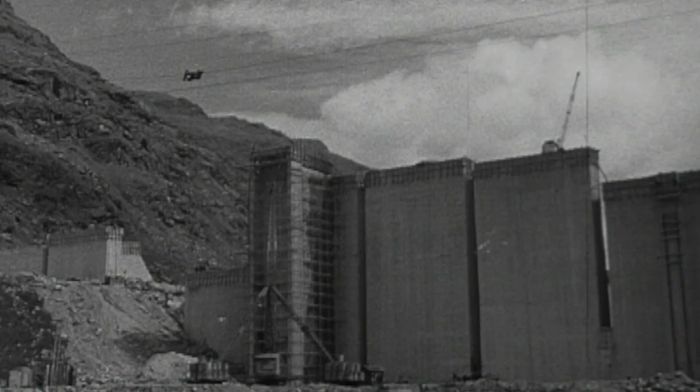In the middle of the 20th century, Scotland experienced an energy revolution. From the 1920s until the 1970s, thousands of men laboured to build huge dams and power plants, enabling the production of renewable hydroelectricity on a grand scale.

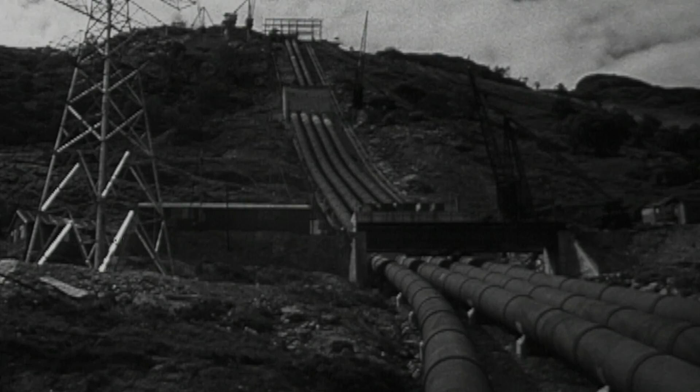Harnessing this power from the glens was difficult, dangerous work, but the energy created supplies countless homes and businesses across Scotland to this day. Now, half a century on, this small nation is bearing witness to another vast engineering triumph. But this time, the power is coming not from water, but from wind.

Part of SSE is Scottish Hydro. It's part of the heritage, it's part of the DNA of the company. The wind has allowed us to reawaken that heritage and bring it up to date.

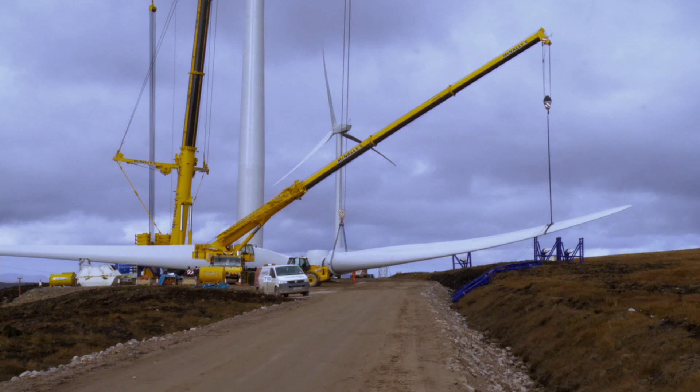We've achieved 1,400 megawatts presently, more than what was achieved in the 50s and 60s from the whole hydro portfolio that we built in those days. And we'll ramp that up to 4,000 megawatts by 2025. The overall capital cost of that onshore wind farm programme will be about £6 billion.

SSE currently has 700 wind towers in operation around the country, from Sutherland to South Ayrshire. To more than double current capacity in little over a decade is a highly ambitious target. Achieving it will require the addition of another 1,300 turbines in sites spread across the UK, from the Shetland Isles to Essex.

Onshore wind is the cheapest form of low-carbon electricity and renewable energy. It's cheaper than nuclear, it's cheaper than offshore wind, it's cheaper than hydro. Therefore, it is the most economic way of society meeting its needs to clean up its energy supply. And that will remain the case. So it is entirely the right thing to do for any country, be it Scotland or anywhere else, to maximise the potential for its onshore wind resources.

Being blessed with a strong natural wind resource is one thing, but wind turbines don't just grow on hills. Each wind farm demands years of planning just to get to the construction phase. But long before that, the process begins with the identification of a suitable site.

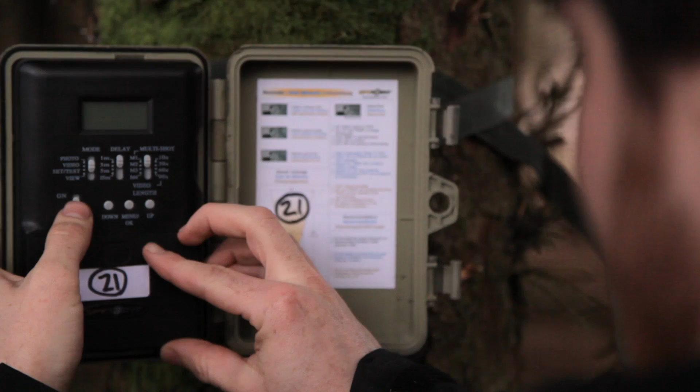...we'll then commence preparation of the scoping report. That's basically to give us the detail behind the environmental impact assessment, so it will determine what additional surveys, assessments, analysis that we need to carry out and include within that impact assessment.

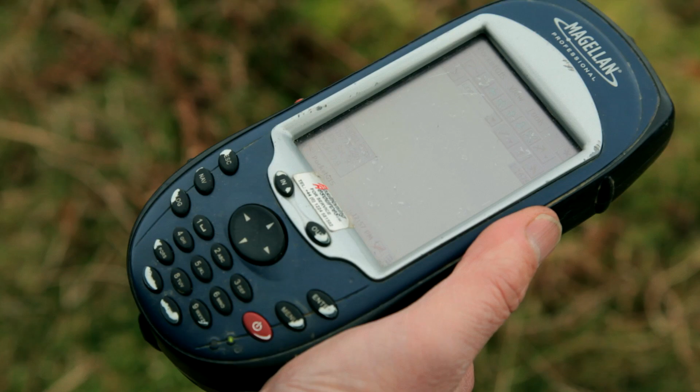Our involvement in a project like this would start with a desk-based assessment where we would examine old maps and air photographs, assess where things had been found in the past. That would provide us with background information to go out and do a field survey, assess whether they still exist, their condition and their vulnerability to the development.

Once that task has been completed, we will compile a report which will be sent to the council and mitigation measures can be put in place. All the surveys and assessments are carried out and we've refined the design. The application will be submitted. Hopefully we obtain planning consent. Once consent's granted, the project is then handed over to the construction team.

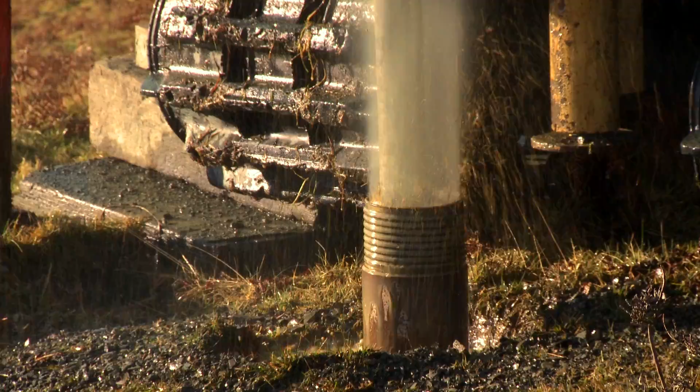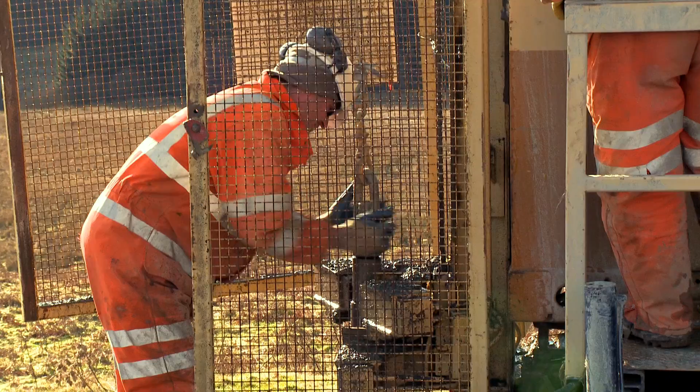It is only now that detailed ground investigations can begin. From desktop studies and the information we've been given before coming to site, and from geological records, we'd tend to know what the ground is made up of, how much soft material overlays the rock, and the type of rock. We then come along and carry out investigations at specific locations, trying to confirm the records, whether they're the same as expected or whether there are any changes across the site which might affect the location of the turbine or its foundation, and also any problems that might come up during construction.

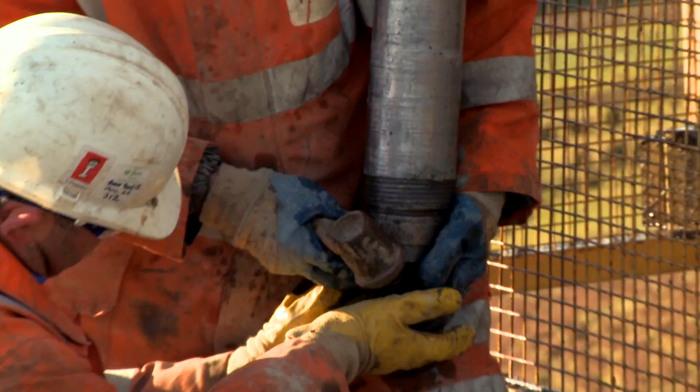The information gathered at this stage plays a significant part in determining the layout of the proposed wind farm. But whatever complicating factors are thrown at the planners, it remains vital that the final site is designed to maximise the available wind.

Initially, it's laid out based on resource, so how much wind you can get from each turbine location. We need to consider issues such as shear, inflow and turbulence, which depend on the topography, proximity to trees, and the wind direction. Does it get channeled up a valley? Does it come over a col? All of these are considered by a resource assessment team to help define a layout.

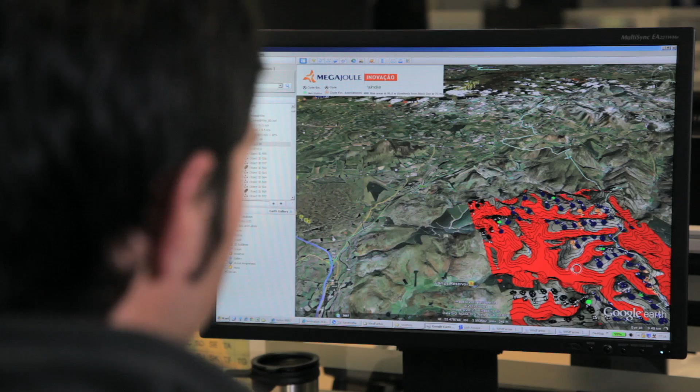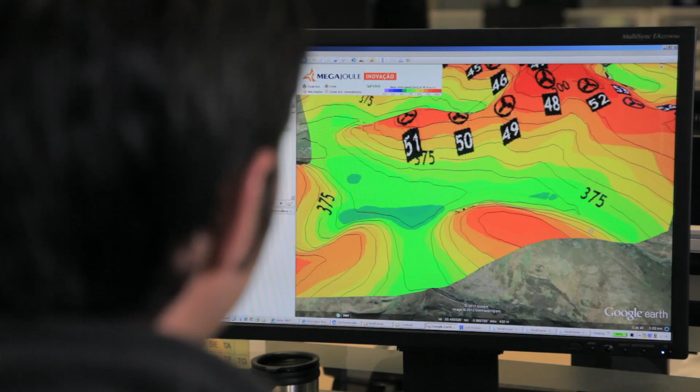We'd measure the wind speed on a site for a minimum of one year, ideally two or more, and then use that to model the actual flow across the whole site, taking into account terrain features like trees, forests, and the orography. We then run that through other models to capture how the wind flows through the site when the turbines are operational, and to capture the wake losses from the turbines generating.

One important consideration for the planning team is how each turbine's position relates to those of its neighbours. Each tower must be situated 5 to 6 rotor diameters from the next. This separation is necessary because as air passes over a turbine, the blades create turbulence. Keeping an appropriate distance between towers allows the turbulence to abate, preventing disrupted air from reaching the next turbine and reducing its energy yield.

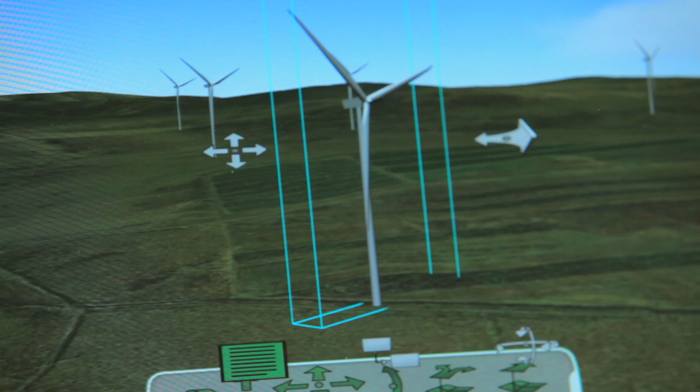Once you've got your spacing of turbines, you then need to look at how that works on the landscape and topography. As wind approaches the landscape, if it hits a hill and is pushed up the side, it may create mechanical stresses which are bad for the operational performance of the machine. So we need to look at whether we can site a turbine away from a cliff edge or a steep slope, while still maintaining the grid spacing from the next turbine and the spacing from environmental constraints. Look at the plan view, John.

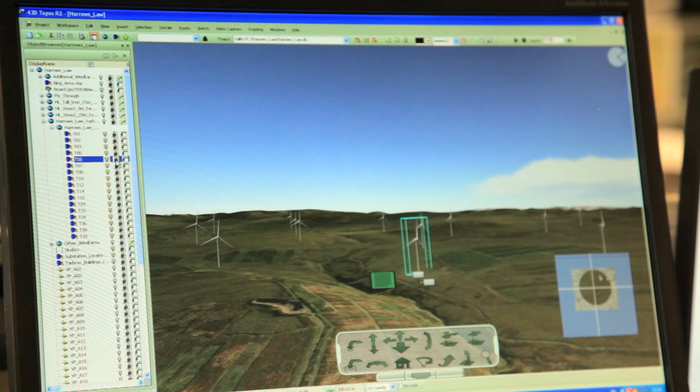When it comes to the design meeting, they sit with all the other parties involved, the ecologists and the ornithologists, and through their information you can refine the design. You can look at how it's going to appear visually in 3D form with all the spatial data put into one place.

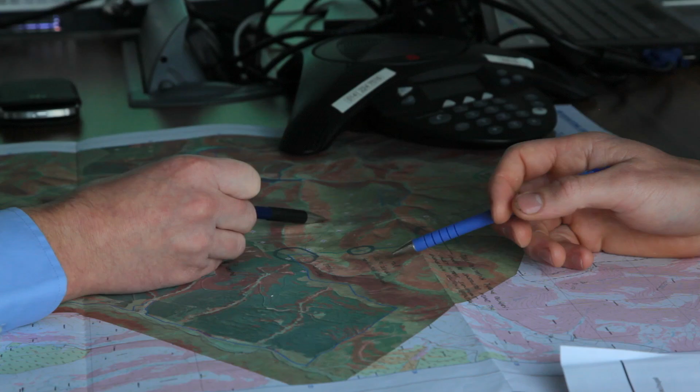There would be concerns if you were building turbines that spoiled a view with Edinburgh Castle, for example. So you could take the castle and run a reverse visibility on it to see what is visible from the castle and what's not, so you know you wouldn't want to encroach that space. Given concerns like that, we wouldn't put turbines in a position that could cause problems in the future.

We'll say where we want to put the turbines from a resource perspective, and then civil engineering will say you can't build it there, or it's going to be very difficult. Can you move it here? So we'd have another look and say, yeah, we can move it this way a bit. Then the visual guys come in and say that looks terrible, can you move it down the hill? So it ends up being a big compromise, but essentially trying to balance all these different aspects to produce the best layout that you can.

The site shouldn't just be looking good, and it shouldn't just be avoiding environmental constraints, but it needs to work. It needs to be constructible from day one.

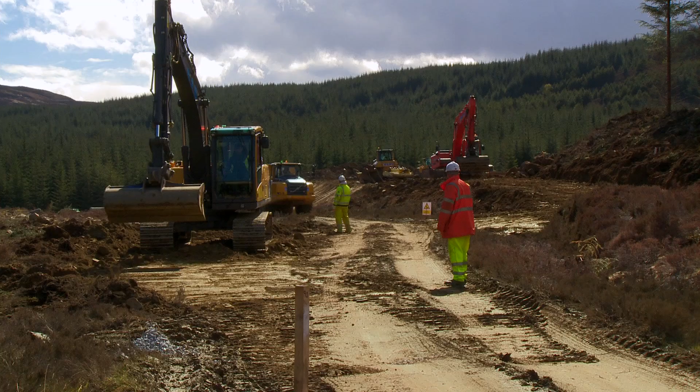Once a site's layout has reached final agreement, all planning requirements have been met, and official consent has been granted, the real work can begin, starting with site clearance.

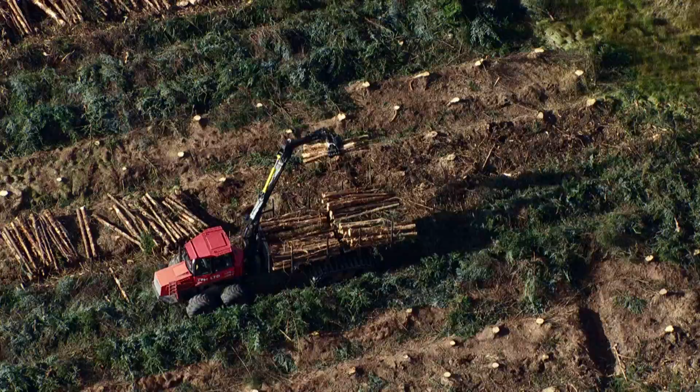People passing the site see wide areas of felled trees. The areas being taken down are non-native, very densely planted, with fairly low ecological value. As part of the habitat management plan for this site, they're being replaced with high-quality moorland and heathland, which are target conservation habitats.

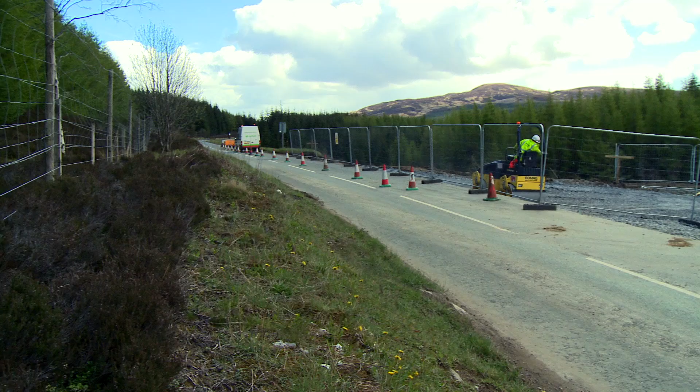Preparing the internal terrain of a wind farm for its family of turbines is headache enough. But for each site, thought must also be given to the surrounding infrastructure and the feasibility of delivering large turbine components via local access routes.

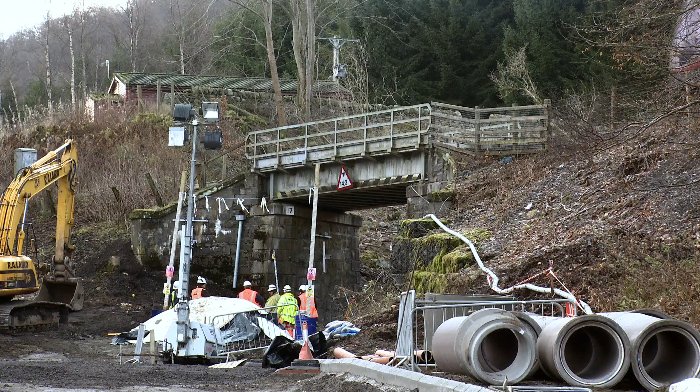Some of the major civil engineering constraints we faced on projects are definitely one-offs. For our Griffin wind farm, we had to lower the road level beneath an operational railway line, a major undertaking at the Ladywell Bridge. That was approximately £2 million worth of work and took a number of months to deliver, and without it the wind farm itself would not have been possible.

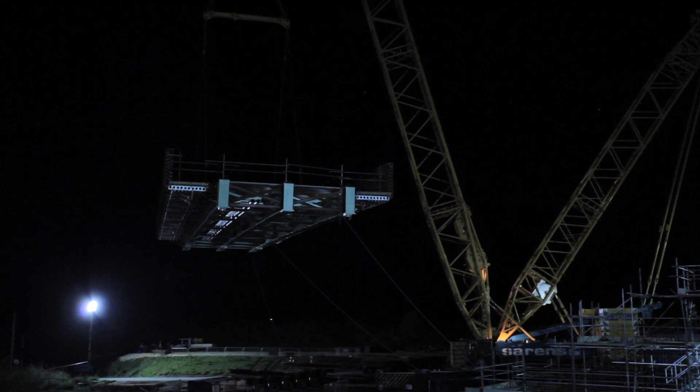At our Keadby site at the moment, we've just completed the installation of a £5 million bridge that needs to cross two land drains, a canal, a network railway line and a high pressure gas main, and that in itself is a major civil engineering project, irrespective of the fact there's a wind farm to be attached to the back of it.

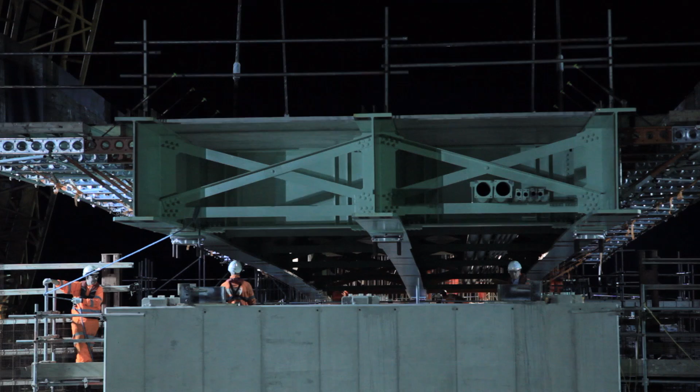Such are the complexities of wind farm logistics that challenges can emerge not just on the ground but also from the skies. The largest wind farm in SSE's portfolio had to overcome a unique problem to prevent the site from sending out the wrong signals.

It was identified early in the development phase that there would be an impact on the local primary radar station adjacent to Clyde Wind Farm from the turbines. The turbine blades have a similar effect on air traffic controllers' screens as an aircraft does. So what we have to do is remove the wind turbines by cutting out the airspace from one radar and infilling it from another radar by developing this radar site in Cumbernauld.

Before any civil construction works can commence, every wind farm site has to be marked out with painstaking accuracy. 90% of the setting out is GPS. We've got a base station at the top of the hill that transmits mathematical corrections to the rover. We walk about with all the information uploaded into the rover. It involves a lot of walking, a lot of bashing in pegs, especially when we're the first guys in, over the hill, carrying the pegs in, starting to mark it out, and then everybody else comes up once the job's done.

With site marking in place, civil works can begin. This entails a lot of big lorries with big loads, as the site's internal roads and infrastructure are gradually created.

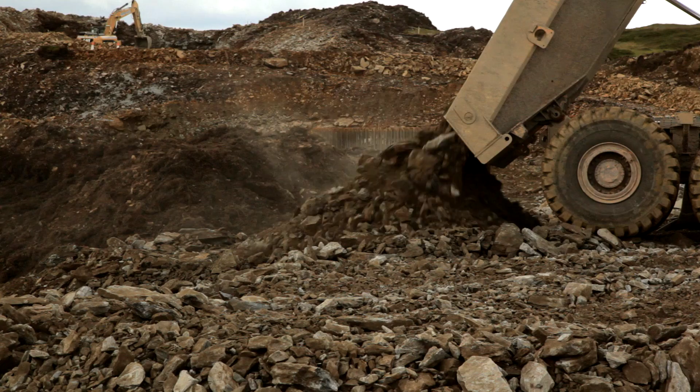To minimize the amount of heavy traffic on local public roads, the stone required for the civil works is hewn from on-site borrow pits. There's going to be more than 50,000 cube getting removed from this borrow pit, but the final total, I suppose, depends on the amount of peat and excavation that has to be done on the way up the hillside.

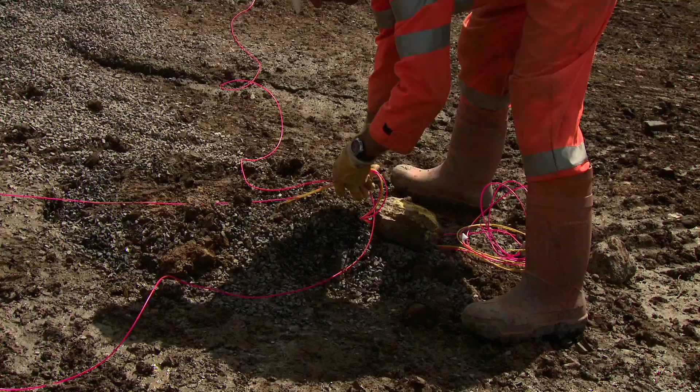The explosives nowadays are very stable. It's non-electric connectors and detonators that we're using. It's a plastic tube lined with a very fine layer of explosive, a lot safer than the electric systems of years gone by. Today we're using approximately 3 tonnes of explosive, and that will produce around 7,000 cube of rock. Ollie to the sentries, just checking we're still all clear. Firing in 10 seconds.

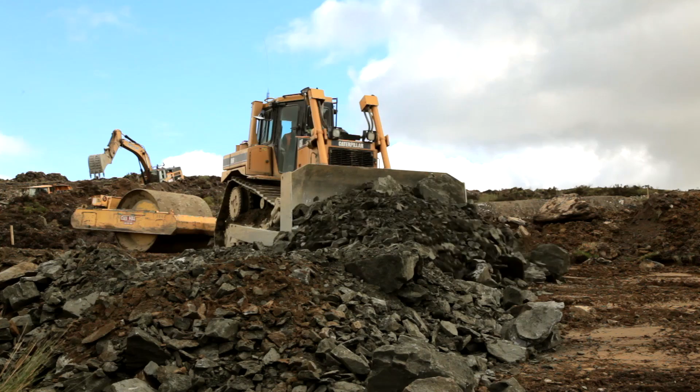The on-site roads, which must bear the arrival of massive wind turbine components, have to be formed upon challenging terrain. And it's another energy source that can pose the biggest problem.

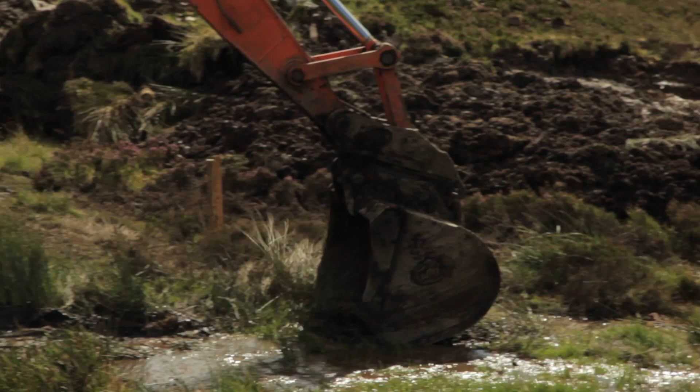It's been pretty good up till now. We're going into the more challenging areas now where there's deep peat, and that can cause a few different scenarios, because the peat will run towards you. So you can just place rock beside it, hold it back, and generally just project your road right through that.

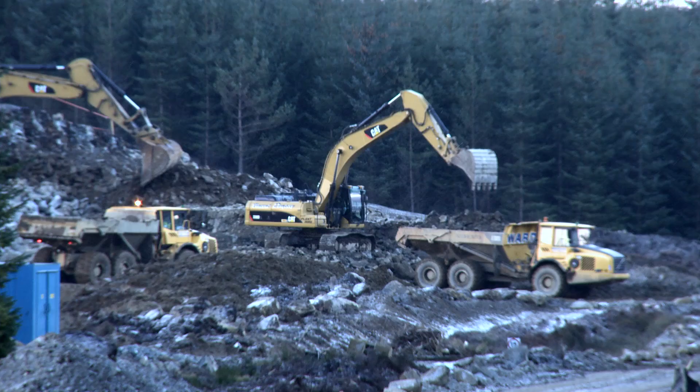Staying on schedule in such environments is challenging enough in the summer months, but when winter sets in, its onslaught can see morale plummet as fast as the temperature gauge.

It's been tough with the weather. It's freezing, it's freezing today. Gales, it's been pretty tough to deal with, but we get there.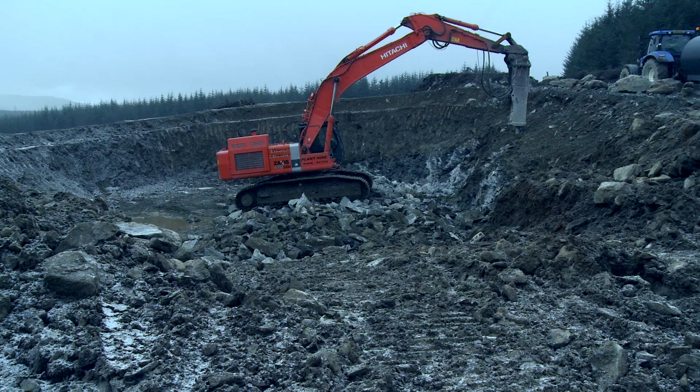Given the lengthy duration of each wind farm's development, every project experiences its share of awful conditions. But thanks to the countless hardy souls on site, work continues come what may, because the first delivery of turbine components is not far away.

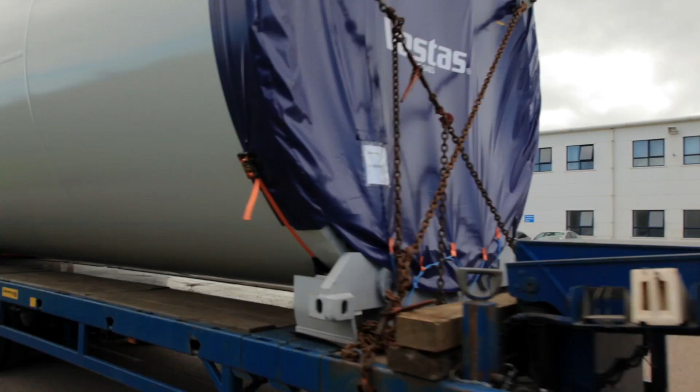Many of these components will come from SSE's own factory in Machrihanish on the west coast of Scotland. The way it works is if you've got an order to place, we'll place it with Windtowers in Machrihanish for the supply manufacturing of our Windtowers. It keeps the supply chain in Scotland.

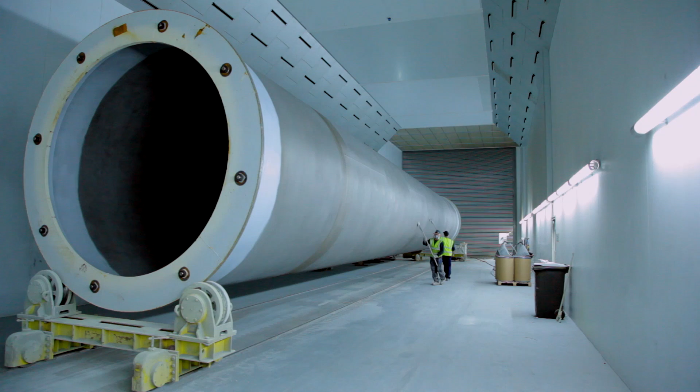It keeps jobs in Scotland. In Campbeltown, being a small area, it's all local people we employ. It's a supply chain partnership, which means the steel work coming through Windtowers' doors, we can trace back to its origins. We know it's certificated, and we know we're getting a good product at the end of the production line, which gives SSE a lot of comfort.

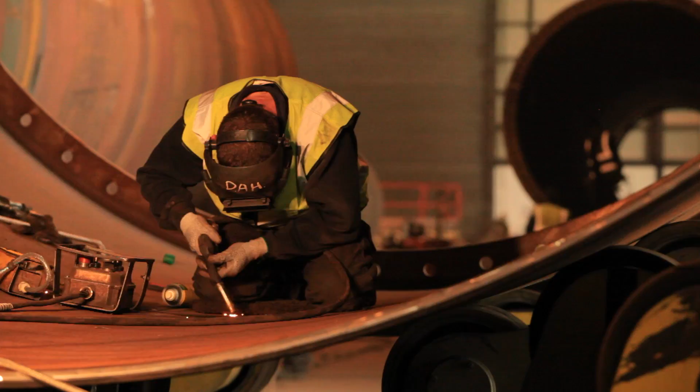The steel plate's delivered here, it's then moved to the roller. It's rolled into a conical shape. It's moved from there to the sub-arc machine on the long seam, which is sub-arc. It's then moved to the blaster, which does the weld prep edges.

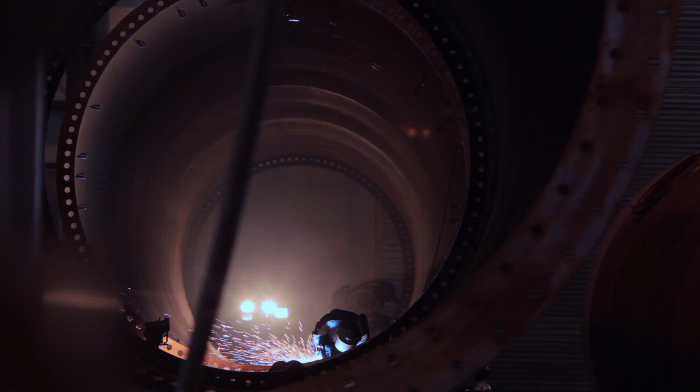It's moved from there up onto the tower section. It's then sub-arced, then moved from there to the QC department for final visual inspection. Some UT reports are done on it, and then it's moved out the door to paint.

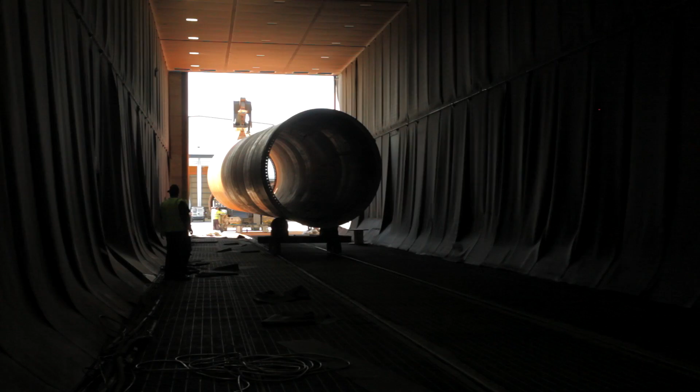Basically, this is the surface treatment. In here we've got the blast hall, where basically we take off the rust and make the tower silver, and give it a profile. It goes from here into here, where we metallise it. Different towers have different specs. Basically, the metallising is a corrosion protection.

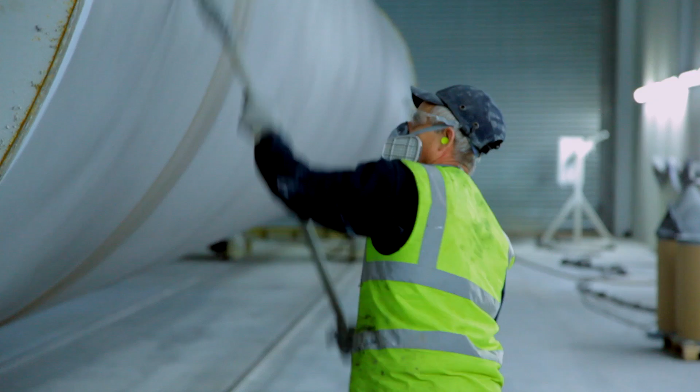Then we wheel it up, ready for painting. The boys scrape off the excess shot, and then it goes onwards to the last stage, the third stage of the process, where it gets painted, and then from there, out the door. And that's the surface treatment.

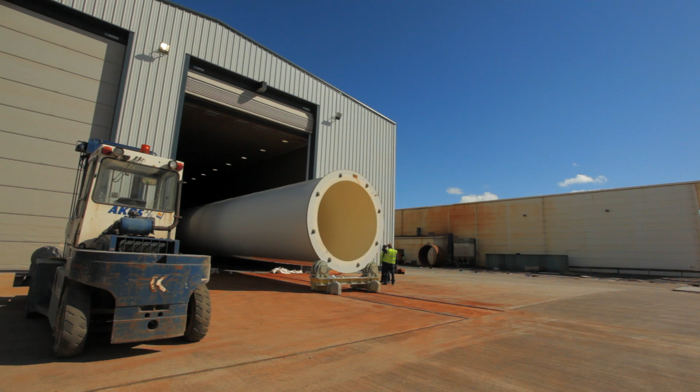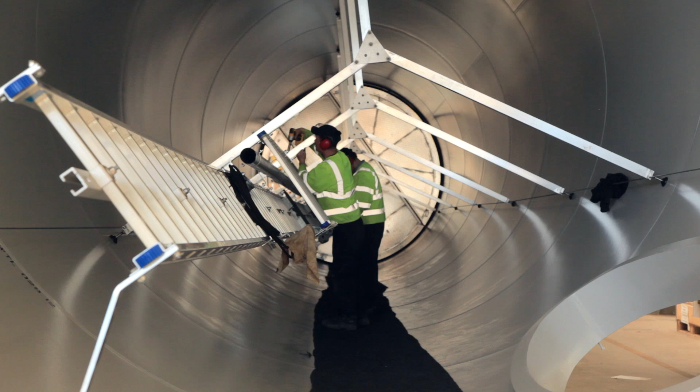The cans arrive fully fabricated and painted. It arrives in our department here, the final fit department, to be fitted out with all internal equipment, from fall arresters to any emergency equipment, lifts, ladders, all the electrical fittings and generators, fitted by the teams that work in here.

Once that's done, the whole interior and exterior will be washed out to a high standard, sealed, and then shipped to site for the customer.

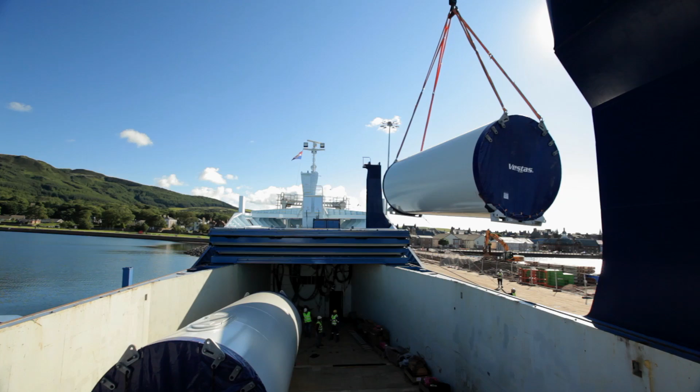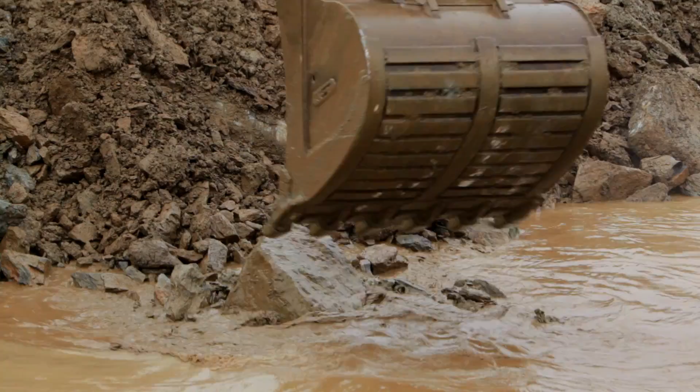Before any turbines can be built on the site, sturdy foundations must be laid to bear these huge structures. To allow a turbine to be erected, you have to prepare the ground, install the foundation, and ensure the ground conditions are sufficient and firm enough to place the concrete, quite a large volume of concrete, and in addition, steelwork.

Soil investigation surveys will give a good indication of what the ground conditions are going to be, but you'll not know until you actually dig out the hole what you're going to encounter — water courses, peat pipes, a variety of different things. It's the soft sites you need to worry about.

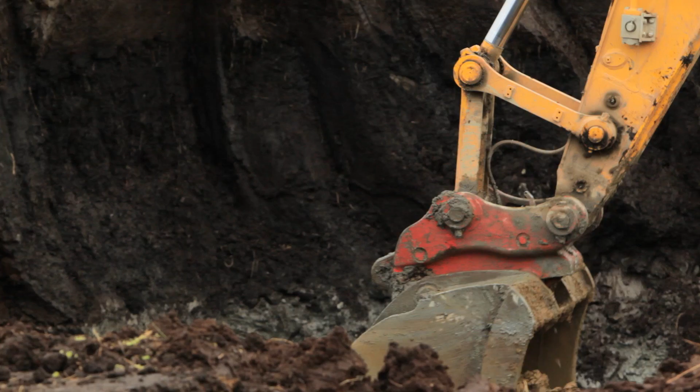Basically what we're doing today is just trying to dig down and get solid rock, unbroken rock that can form part of the turbine base, which has proven to be a bit difficult.

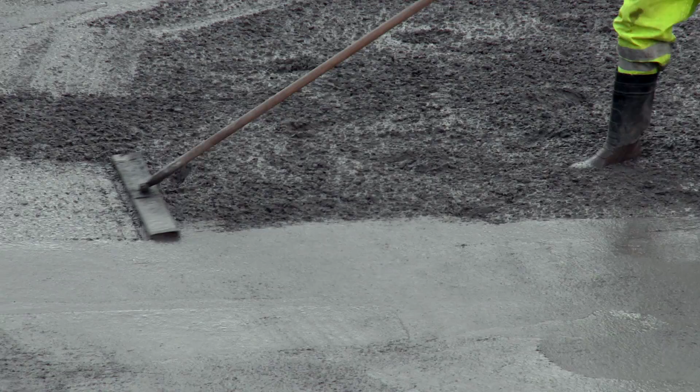Once the challenge of identifying a natural rock base has been met, the man-made foundation can be constructed on top. The foundation will be approximately 350 cubic metres of concrete, which gives you about 760 tonnes of concrete.

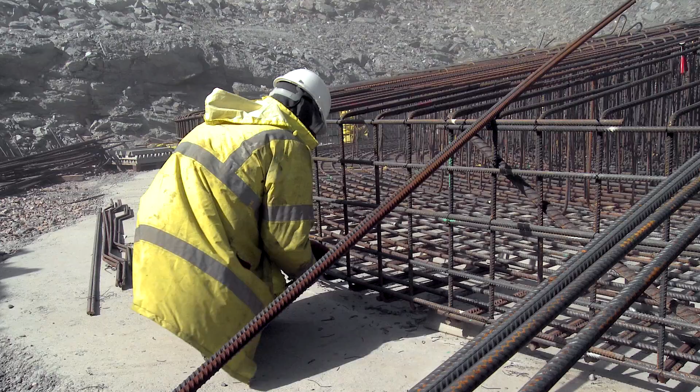With approximately another 1,000 tonnes of material ballast over the top of it, you've got approximately 250 tonnes being held down by 1,700 tonnes of foundation. So it's going nowhere.

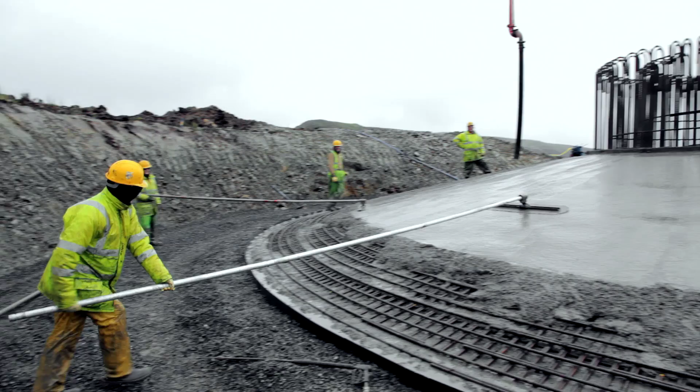Once all that's placed, you backfill it, place an earthing mat around it, and once it's all complete with a hard standing area for the crane to lay down on, then you can physically start the erection process. There are a few finishing touches before the hard standing area is handed over to the site subcontractor, in readiness for the turbines to be erected.

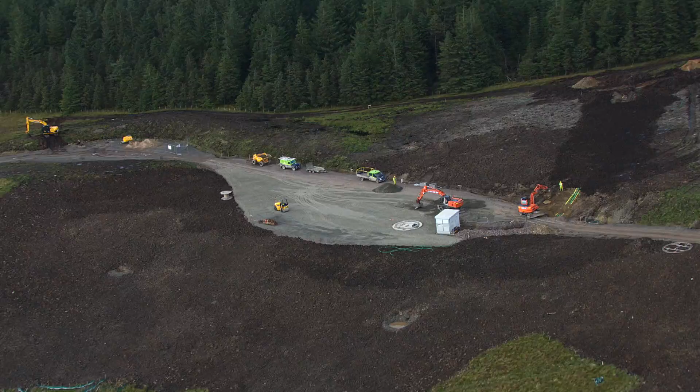There are a few finishing touches before the hard standing area is handed over to the site subcontractor, in readiness for the turbines to be erected. Once the civil contractor has completed the foundation and the hard stands...

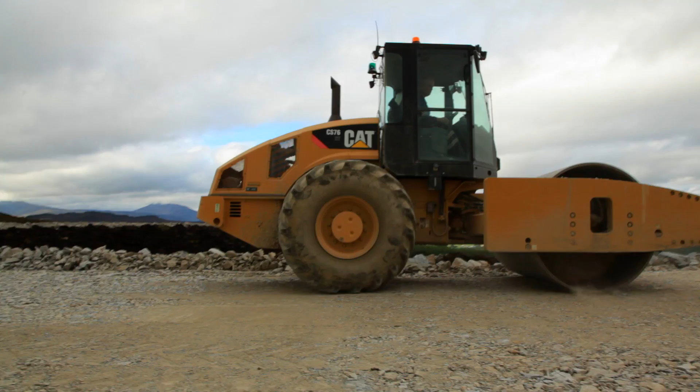Ourselves, the crane company and the transport company come to inspect the foundation. We inspect the hard stand area to make sure it's of sufficient size.

We check it's correct to the design drawings. Once we're happy with that, we then take acceptance of the hard stand, take it over, and it becomes our area.

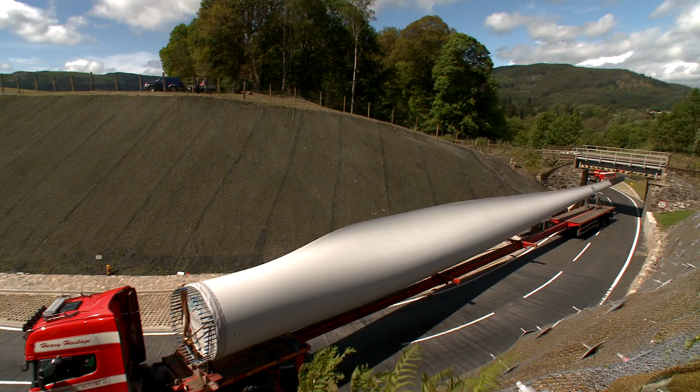With the foundations ready to receive their towering occupants, there remains the small matter of transporting the turbines to the site. One of the major issues is the turbine blades themselves are 49 metres in length, which is half the length of a rugby pitch, so they're sizable objects.

We've had to make some fairly major modifications to the public roads off-site in order to allow these to be delivered, and the roads on-site have to be designed to cope with these long and, in other cases, heavy loads.

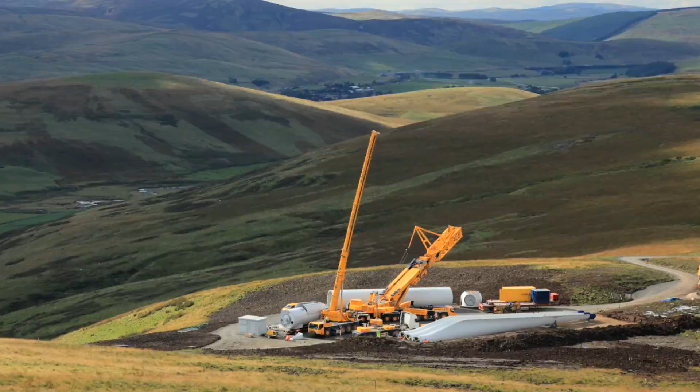Each turbine will be over 120 metres in height. To stand each one upright requires the help of not one, but two cranes. The smaller crane actually builds the bigger crane, then assists the large crane to erect the turbine.

The whole process is quite quick. With the tower sections, it can be as quick as an hour for each tower section, an hour and a half for the nacelle, and the rotor assembly itself takes around 4 hours to put together and about an hour to fly. So in a day, with perfect conditions and no problems, you can build a turbine.

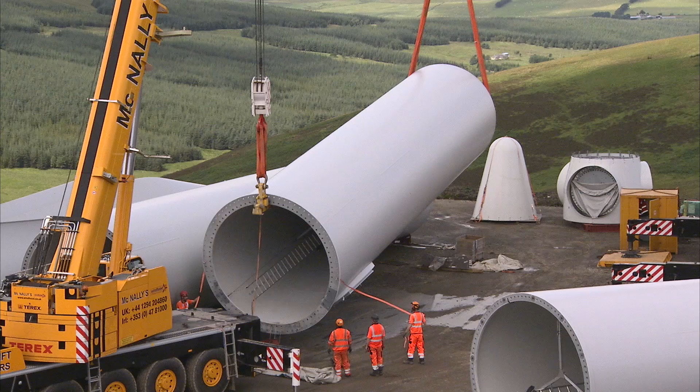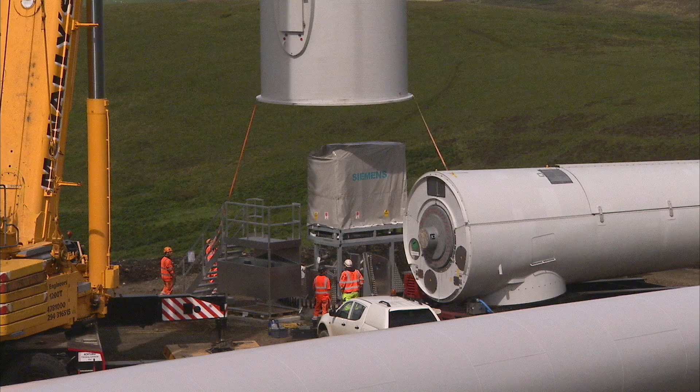When we're erecting the tower, the large crane will lift one end and the smaller crane will lift the other end, and we call it a tandem lift. We lift it up, and once it's clear of the ground, the large crane proceeds to lift, and the smaller crane starts to lower off to release its weight until we have the tower section vertical. Then we release the small crane from the section, move the section into position, land it, and continue with the other two tower sections.

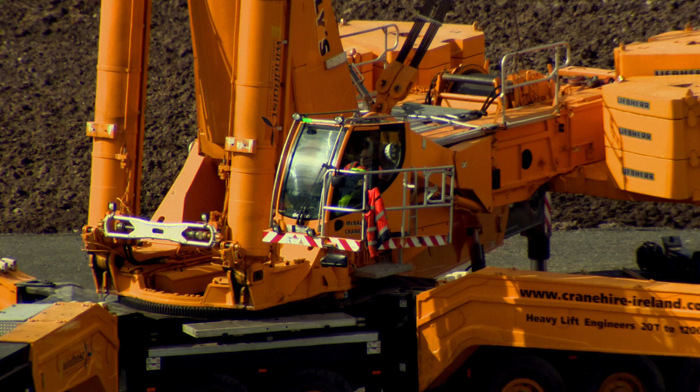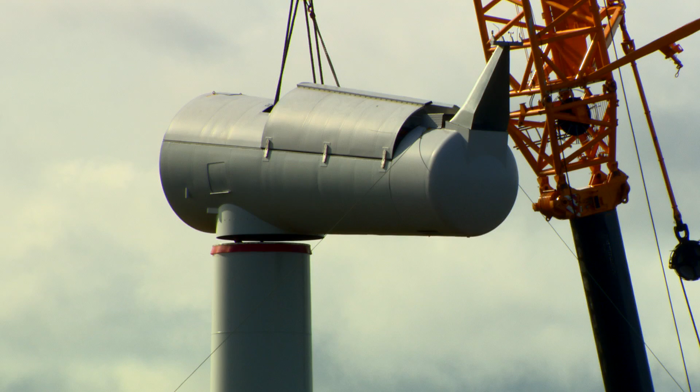It may sound straightforward, but pinpoint precision is required to stack the tower safely and accurately. From that stage, the nacelle, which houses the gearbox and the generator, is lifted into position. We have to make sure the weather conditions are good for that because the nacelle actually weighs 87 tonnes, so we need pretty perfect conditions.

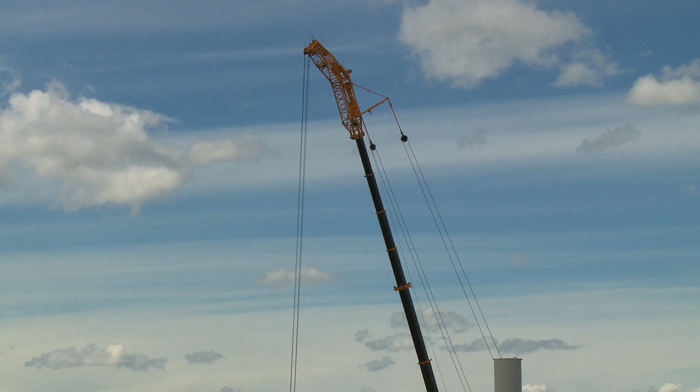Last, but very far from least, is the rotor assembly. It's the largest item that we lift, and it covers a wide span - you have 45 metre long blades. We assemble the blades into the rotor with the rotor lying on its back on the elephant's foot, and we can leave it in that position so long as we tie the blades down.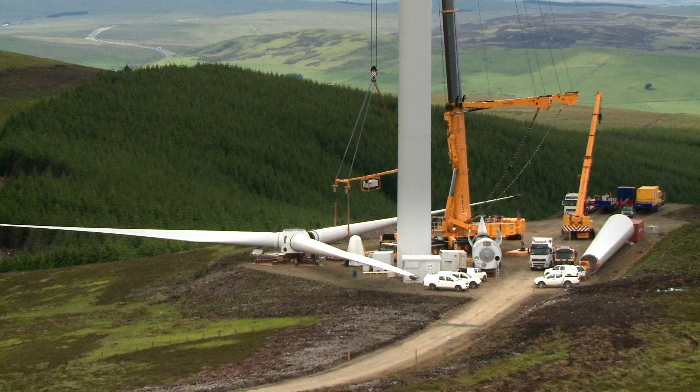Edging the hulking blades into place is challenge enough, but once the blade assembly is complete, there is still the considerable task of hoisting it into place on top of the tower. The powerful winds that make these sites ideal locations for wind farms also make them a very difficult place to build them. Maximum lift wind speed is gusting to 9 metres a second.

If we're in that parameter, we have to decide maybe not to lift above a mid-tower section. We look at weather forecasts on a very regular basis, and we also pick up wind speeds from the crane anemometer, which dictates how the crane driver will operate. You've got nearly 60 tonnes of weight there, and it's designed to actually catch the wind - that's the design of the blades - so to lift it in any kind of adverse weather condition is extremely dangerous.

When you've been working on a wind farm for a length of time, you get to know the wind patterns, and you can pick a pattern where you know you're definitely going to get this rotor up. If there's any doubt at all that the wind is going to get up too high to lift the rotor, then you don't lift it - it stays on the ground.

Once you pick up the rotor assembly, that's it - it's got to be assembled. It's impossible to fit the blade clamp back on the blade with the tailing crane to drop the assembly down again.

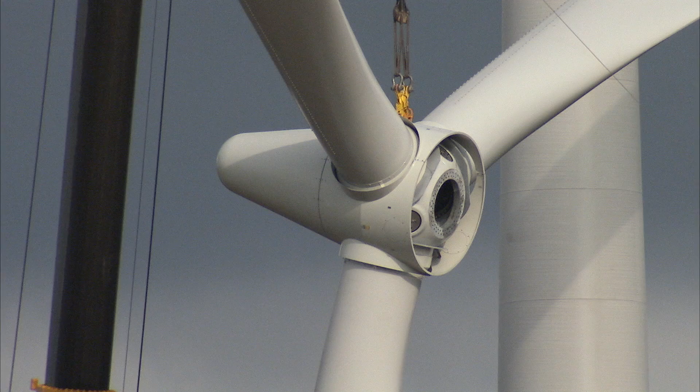The ideal world is that we have no wind or 5 metres a second, but we're on top of a big hillside in Scotland - we'll always have wind.

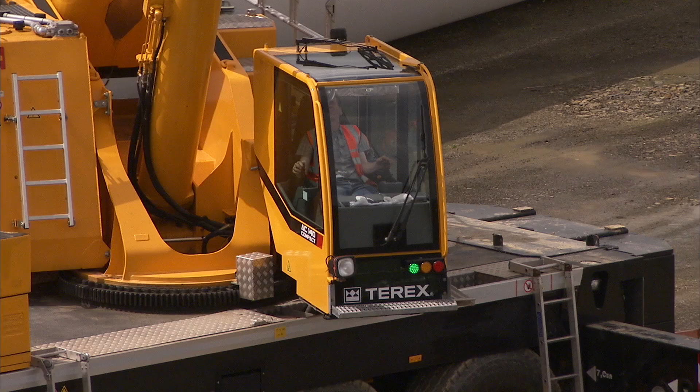The installation of this cumbersome structure is a masterclass in crane coordination. Once the rotor's actually flown, it takes 45 minutes to take up to the top, and all the time it's governed by the crane management, guide ropes, and a crew at the bottom which is in contact all the time with the crew at the top, who then manage the actual meeting of the turbine blades with the nacelle. It's so accurate, it's done to millimetres.

Once it gets closer, the wind has less effect on it because it's closer to the actual crane and closer to the nacelle. The biggest part is lifting from the base to the top.

People misunderstand the time frame for building turbines. Sometimes we can get up to nacelle level, the rotor is assembled, and we're waiting a week for the weather to calm down enough to be able to pick that rotor assembly up.

Safety is paramount to the success of the project, so we won't risk the safety of any individual on the site just because we can maybe get a turbine up early based on fractions of wind. We'd rather deliver the project safely than have an issue with somebody's life.

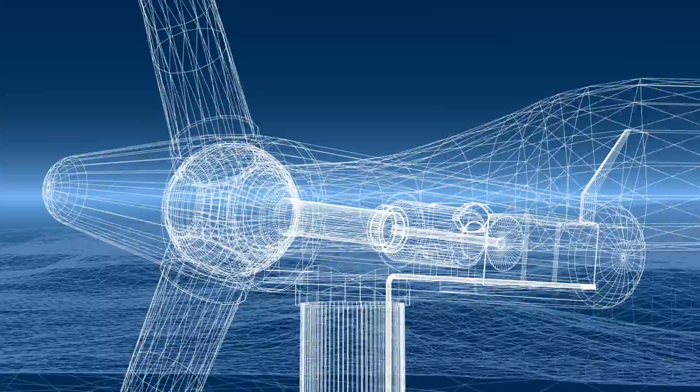The purpose of a wind turbine is simple, but there's some complex, clever engineering at work inside. The blades receive energy from the wind as it blows over them, translating it into rotational energy.

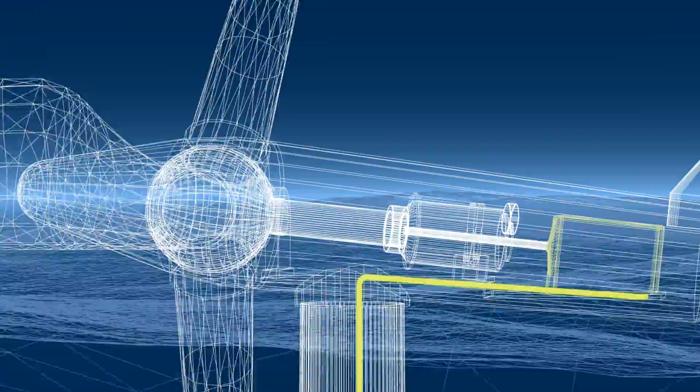This is transferred along the main bearing within the nacelle, spinning it and putting torque into the gearbox, which turns a shaft in the generator. As this happens, magnets are being rotated through a magnetic field, creating electrical energy.

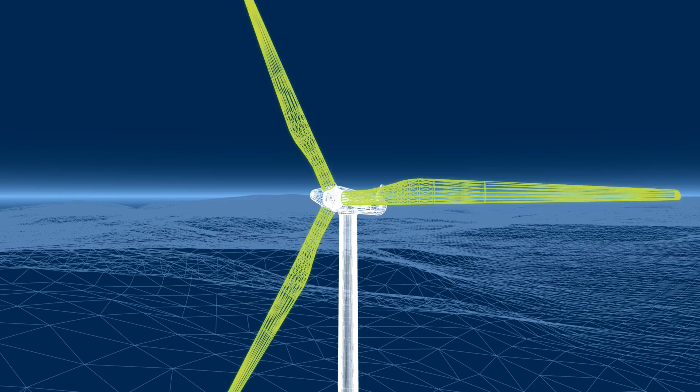But as wind characteristics are not constant, some flexibility is required. Blades need to be able to alter their pitch depending on the wind's speed and bearing, so they're designed to rotate around their axis, while the machine itself can also follow the wind's direction.

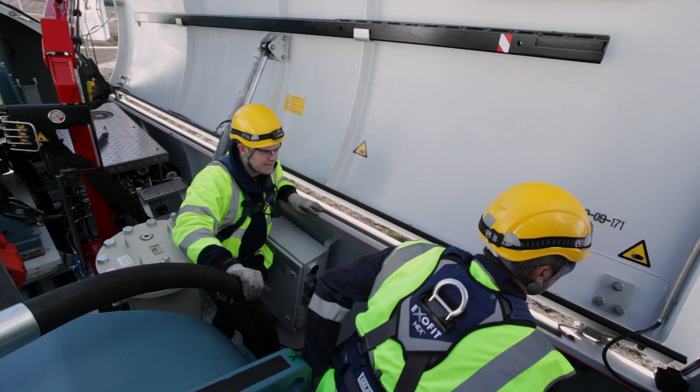The turbines themselves, they take quite a hammering from the weather in all weather conditions. They are certainly a great feat of engineering and a fantastic bit of kit to be working in.

Throughout a wind farm's lifetime, the involvement and well-being of nearby communities is of paramount importance. Being a near neighbour has its benefits: job opportunities, local environmental and infrastructure improvements, not to mention the clean energy produced. But there are also windfalls to be shared.

SSE has already set aside over £11 million for community investment funds to help support educational schemes, public amenities and volunteer organisations. It's recognition that local communities are hosting the wind farm in their area.

It's to sort of recognise the fact that there will be some disruption during the construction phase, but also to give them a much longer sort of long-term investment fund so that they can plan what they want to use the funds for and to do some good in the community as well.

And they're looking after our wind farm for us, if you like, in the local area, and it's nice to give something back.

Thanks to their sheer dedication, and in spite of the difficult challenges, countless individuals have helped to make these vast feats of engineering an outstanding and ongoing Scottish success story. Across the nation, hundreds of these steel titans are now turning quietly, day and night, and each turn of a turbine blade contributes to a larger revolution, shifting the production of power towards a renewable future.

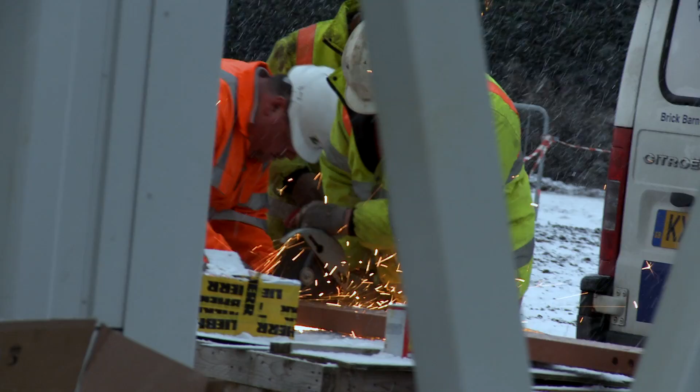The varying weather conditions, the difficulties associated with the various elements and interfaces in the construction has proven to be a huge challenge, and they have all overcome it.

We can't go on misusing and abusing the planet as we've been doing. We have to move to renewable forms of energy, and Scotland, I think, should lead the way in that. We shouldn't just follow behind, we should actually lead the way, because we've got some of the great resources.

Scotland can absolutely and will meet its own energy consumption from renewable sources within the next 5 to 10 years. And Scotland absolutely has the potential to export clean energy. Scotland is uniquely blessed with the right geography and the right engineering skills and heritage to be a renewable powerhouse.

Renewable energy has always been our tradition. It's been at the heart of everything that we have done. In the past, the engineers, our forebears, built their hydroelectric dams from 1920 to about 1970.

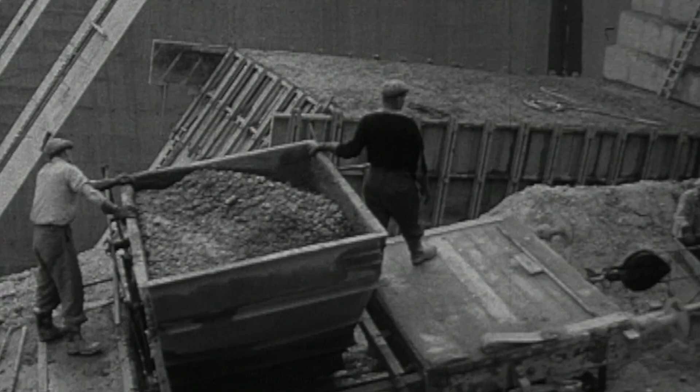So over a 50-year period, they created over 100 dams, 1,000 megawatts of power from the glens. They became a tradition, a legend of their time within hydroelectric.

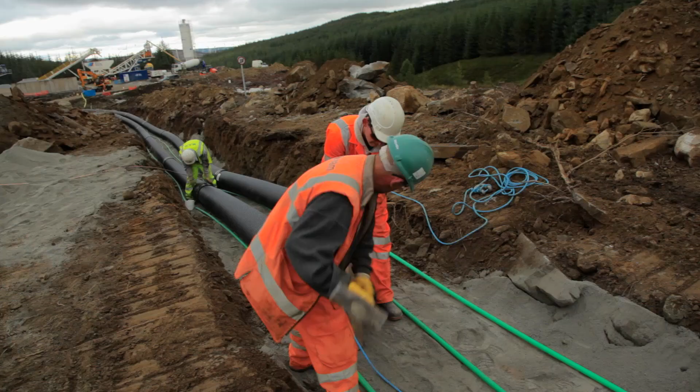We're sitting here with new engineers, new challenges, looking to put in almost 4 to 5 times as much power for over a 20-year lifespan. It's a huge engineering challenge for our engineers, and will create heroes of a new generation.